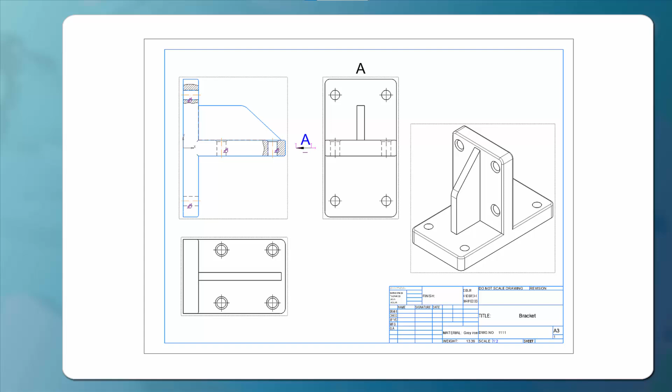Let's add several broken out sections. We are going to place the broken out sections on the front view. So the first thing we need to do is make this view current. A current view is colorful.

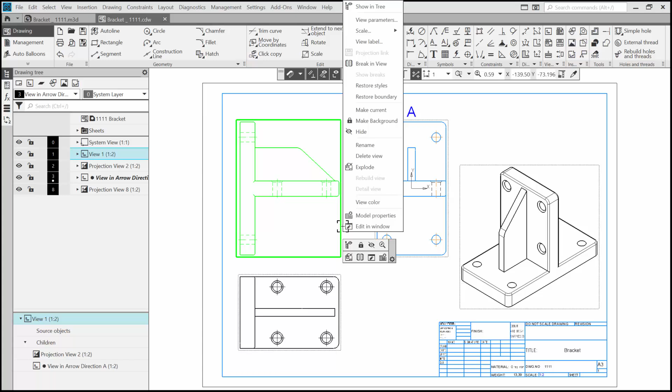To make a view current, double-click on its frame or on any of its lines. Or you can select a view, right-click, and select Make Current from the context menu. And you can select a view in the tree, right-click and select Make Current from the context menu.

Now we need to create a closed profile to define the broken out section. You can create such a profile using the circle command, ellipse, spline, and sometimes even the rectangle command. The most frequently used option is spline.

Start the spline by vertices command. You can find it by clicking next to the toolbar name. The geometry toolbar will expand. Then set points for the spline one by one. If you created an extra point, like I did, you can select it in the vertices table and click Delete.

When you finish, check the Close Curve option. It's important because otherwise your spline will remain open and you won't be able to use it as a profile for the broken out section. Note that in this case the line style doesn't matter.

We need the broken out section command from the Views toolbar. Let me expand the View toolbar to see its commands better. First, I need to shrink any of the toolbars to free up some space. Hang the cursor over the line between the toolbars. When the cursor arrow turns into a double-sided arrow, hold down the left mouse button and drag to shrink the toolbar. Repeat for the View toolbar to expand it.

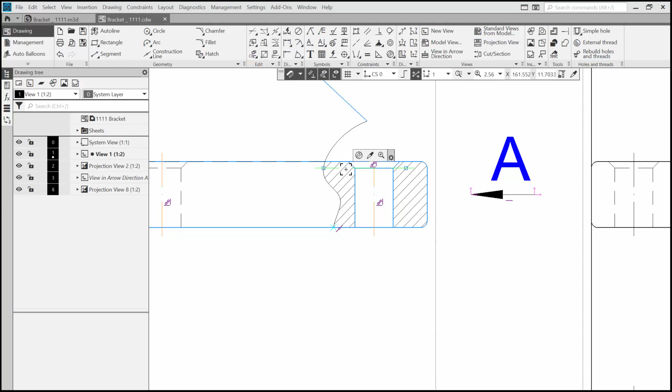Start the Broken Out section command. Select our profile. Then specify the cutting line position on the other view. In this case, the plane goes through the hole center in the top view. Let me delete the lines we don't need. You can notice that we have cut the rib. This happened because we had selected the holes behind the rib.

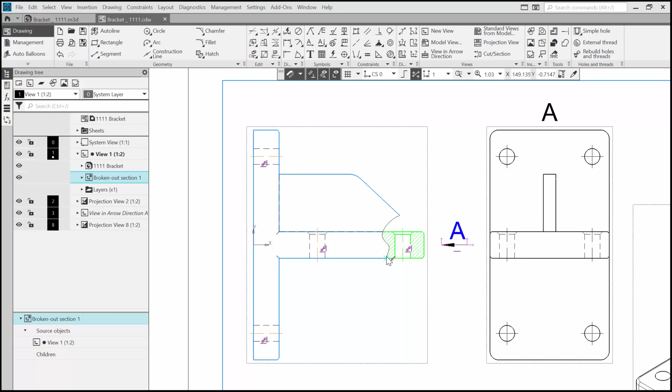Let's fix this and see how to adjust the broken out section. First, you need to select it. Find the current view in the tree. It has a black circle symbol next to its name. Expand it. Select Broken Out section. It will be highlighted in the drawing. Let me zoom in. First, I'd like to adjust the curve a little.

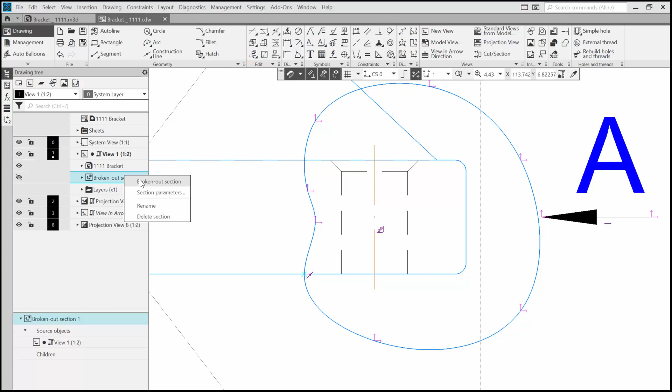Right-click Broken Out section in the tree and uncheck Broken Out section. Now you can correct the profile. After you finish, check the Broken Out section option again. Rebuild the drawing. Now let's correct the cutting plane position.

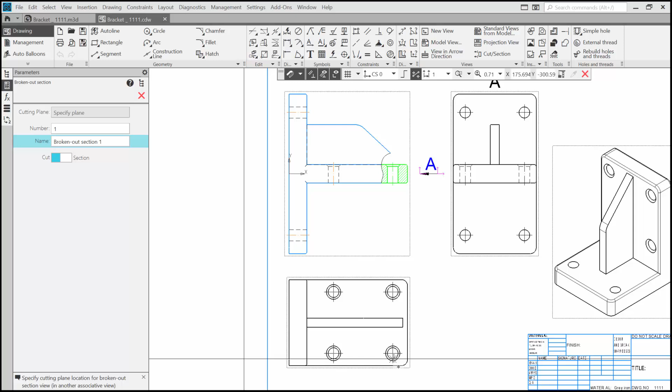Right-click the section again and select Section Parameters. Then click Cutting Plane in the Parameters toolbar and specify a new position for the cutting plane. Confirm the command and rebuild the view. Now the rib is OK.

Add a new broken out section, but create the profile in a different way. Let's use the Wavy Line command in the Symbols toolbar. Place the first point on the part's edge. For the second point, I want it to be horizontally aligned with the first one.

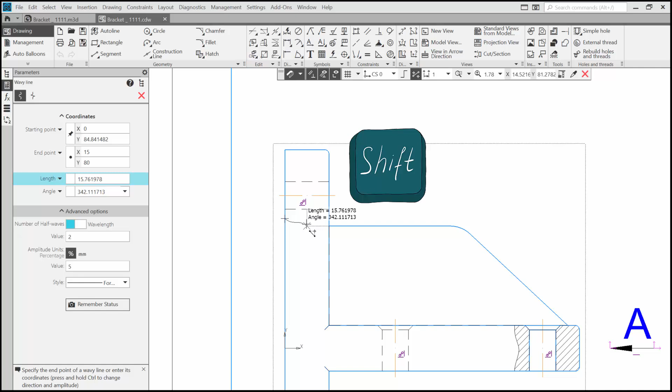I can hold down the Shift key. It allows me to create objects only parallel to the coordinate axis. Or I can turn on the orthogonal drawing mode in the Quick Access bar. Place the second point of the wavy line.

Let's adjust the line parameters. Change the number of half waves. To finish the wavy line, click to define its position. Stop the command. Now we have a nice but open line for the section profile. Let's close it. Select it, right-click, and select Explode.

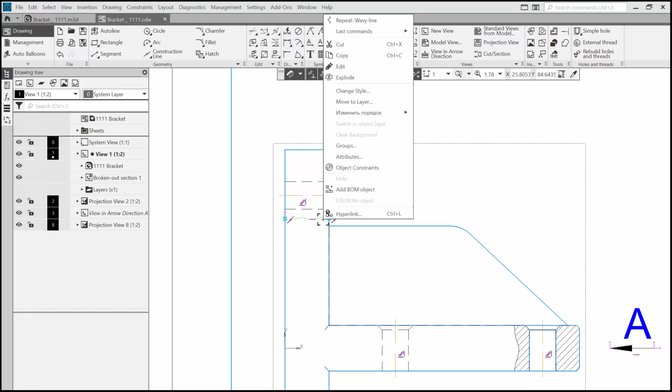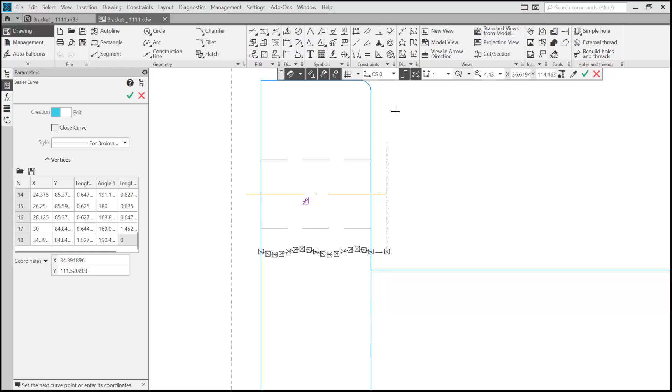The line has been converted to a Bezier line. Let's edit it. Turn on the Create option. If you try to add a new point, you will see how the orthogonal drawing mode works. We don't need it now. Turn it off. Create the profile. Don't forget to check Close Curve.

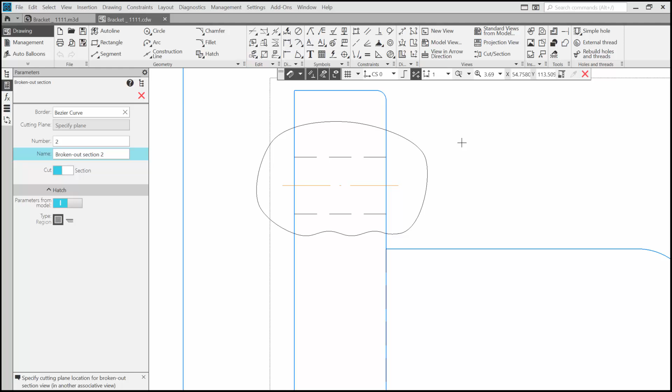Start a new broken out section. The curve had been selected before I started the command. You can see it in the border field. Specify the cutting plane position. I'll click the Show All option in the Quick Access bar to fit the drawing to the screen.